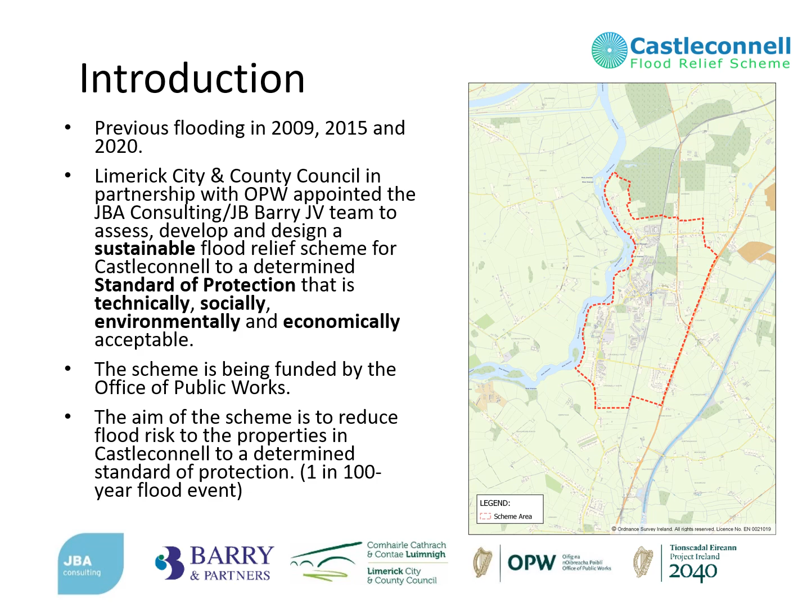There are 5 stages to the scheme, which is currently progressing through stage 1. This takes us from project commencement to options assessment, scheme development and design. This is the longest phase due to the level of assessment required to develop options that balance all needs of the scheme. The first public participation event was held in June 2020 to gather information from the public regarding the previous flooding experienced in Castleconnell and to understand what elements of a potential scheme are most important to the local community. Following this, the second public participation day was held in September 2022 to present a range of measures that had been considered and tested prior to arriving at 3 emerging preferred options. The public were invited to share their thoughts on each of the options and any potential constraints to their implementation, and asked to identify the option that they would like to see brought forward. This feedback aided in the identification of a preferred option, which is on display at tonight's event.

The scheme will soon progress to stage 2, and the planning submission to An Bord Pleanála is programmed for the end of this year. The detailed design will begin following the planning submission to allow the scheme to go to tender as soon as possible once planning permission has been granted. It is anticipated that construction will begin at the beginning of 2025, with the works expecting to take approximately 1 year to complete.

An updated and improved flood model was developed for the scheme to refine the work previously completed as part of the CFRAM study. The model was updated with a recent topographical survey and calibrated to both measured and anecdotal flood levels for past flood events. The Shannon downstream of Parteen Basin splits into 2 channels, the Ardnacrusha Canal and what's referred to as the Old River Shannon. The hydraulic model is a catchment-wide model for the Old River Shannon, from Parteen Weir to the north down to its confluence with the Mulkear River to the south. It also takes into account the tributaries along this stretch, including the Cedarwood and Stradbally streams within the village and their impacts on flood flows on the Old River Shannon. It was important to consider the capacity through Ardnacrusha Power Station to more accurately estimate the potential flows down the Old Shannon in flood events.

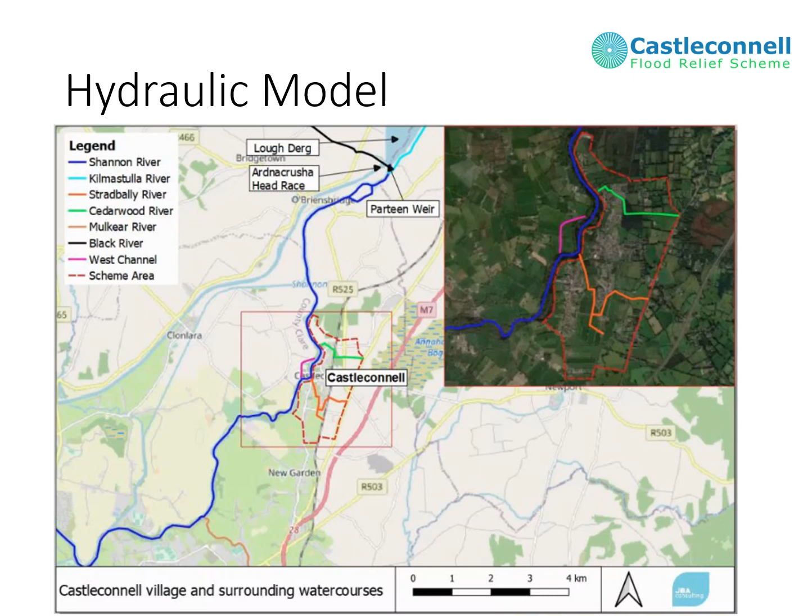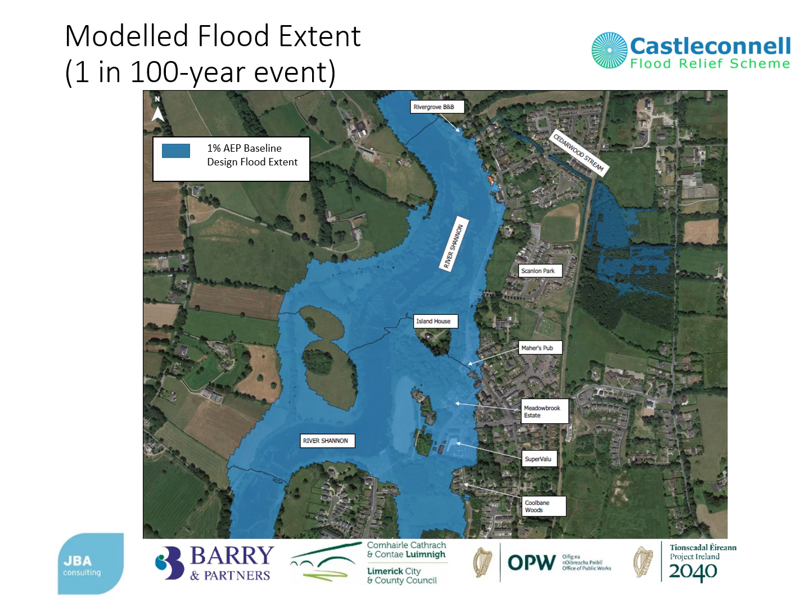The flood map on this slide shows the baseline flood extents for the 1% annual exceedance probability, or AEP, event. This is the equivalent to the 1 in 100 year event, which means that there is a 1 in 100 chance of occurrence in any given year. This modelled flood extent highlighted 50 properties which are at risk and allowed a suite of measures to be tested within the model for their effectiveness in protecting these properties. Those measures that proved effective were grouped into options, which were presented at last year's public participation event. The feedback received at this event was included in the options assessment and evaluation, along with other factors such as economic, social, cultural heritage and environment, and ultimately resulted in the identification of a preferred option. This option was presented as option 2 at last year's event and is the most extensive, offering protection to the Mall Road during a flood event.

Although this option is also the most expensive, with a challenging cost-benefit ratio, feedback highlighted the importance to the community of maintaining access to the Mall Road at all times. The proposed scheme includes defences such as floodwalls, embankments, road raising, floodgates, non-return valves and culvert replacement works, from Rivergrove B&B to the north down to Coolbane Woods at the south of the village.

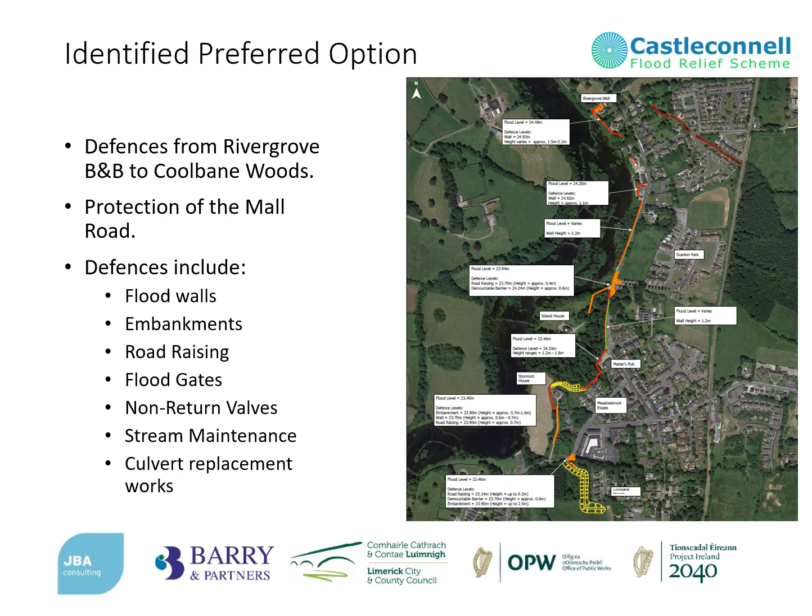Operational protocols and formal maintenance plans will be put in place as part of the scheme to ensure that the demountable defences are installed at a predetermined trigger and that they are inspected and maintained on an annual basis. Pump sumps are proposed at 3 low points in the village to pump surface water over the defences during flood events. Stream maintenance is proposed along the overgrown sections of the Cedarwood stream, along with some culvert replacement works. The scheme has been designed to ensure minimal impact on the adjacent special area of conservation and surrounding environment.

The proposed works to the northern properties include the construction of a new flood wall along the same alignment as the existing walls. Localised glass panels are proposed to maintain views of the river from key vantage points. The existing entrance to Rivergrove B&B will be replaced by a flood wall, and a new entrance will be provided at the northeastern corner of the property.

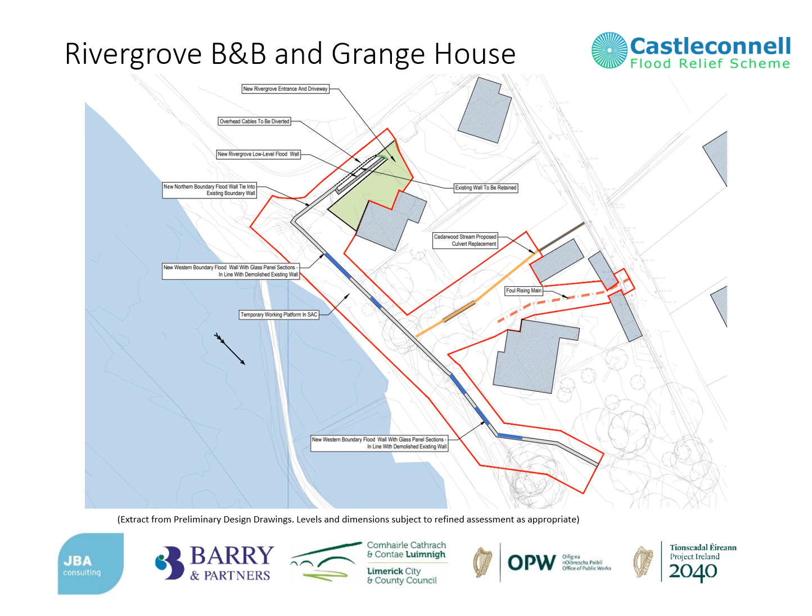Due to ground conditions, the proposed flood wall construction will comprise sheet-piled foundations with a capping beam supporting the wall above. The wall will be clad with a similar stone to the existing walls to maintain the architectural character of the properties. A new culvert will be provided for a length of approximately 36 metres at the downstream end of the Cedarwood stream, replacing an existing open feature. A proposed flood wall will wrap around the northern, western and southwestern boundaries of Mall House, and a floodgate is proposed across the entrance to Dunkeneely House.

The existing Mall wall will be removed and a new flood wall is proposed approximately 1 to 1.5 metres inside the existing alignment. This is to avoid impacting the adjacent Annex 1 alluvial woodland. Stone from the existing wall will be reused to clad the new flood walls where possible. Where new stone is required, a similar stone will be sourced locally if possible, to maintain the cultural and architectural heritage of the area. The 2 red arrows on this slide show the viewpoints for the photomontages on the next 2 slides.

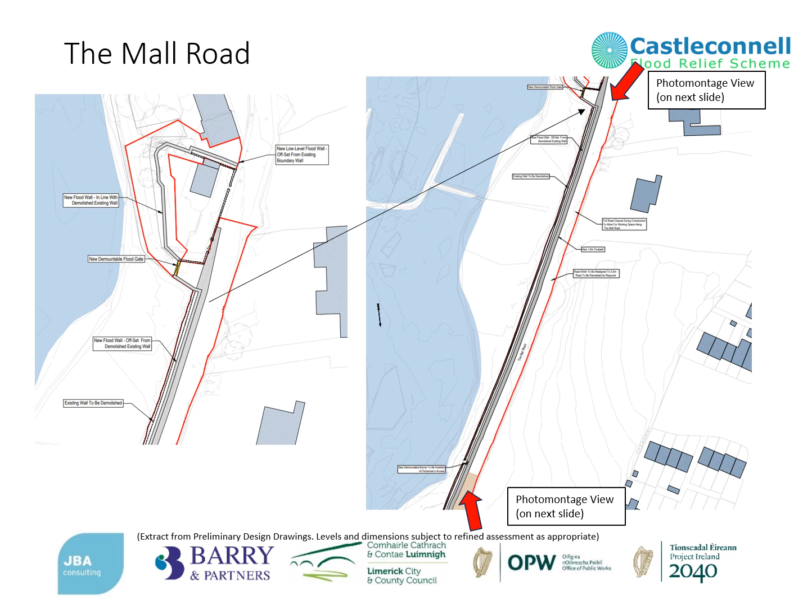The first viewpoint shows what the Mall Road looks like both before construction of the scheme and after, from a location outside Mall House and facing south. Although the new wall will be approximately 300 millimetres higher, it is not expected to impact the views of the river or affect the character of the area. The narrower road, which complies with minimum road widths in current standards, will have the added benefit of slowing down traffic entering the village from the north.

Viewpoint 2 shows the view from a point at the Scanlon Park Junction facing north. A demountable floodgate is proposed in the main fisherman's access, which will only be installed in advance of and during flood events, so that access can be maintained for the remainder of the year. The road will be raised by approximately 400 to 500 millimetres, forming a tabletop ramp across the entire junction.

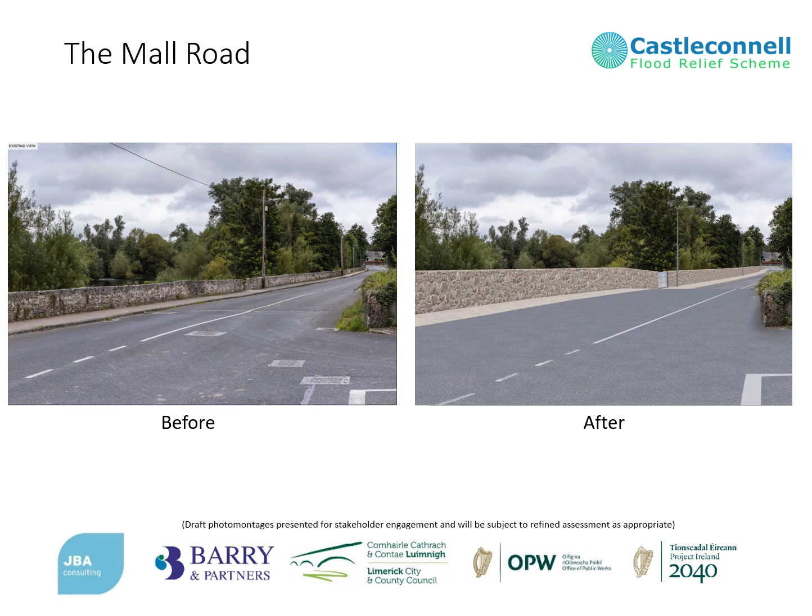This road raising provides passive flood protection for the 1% AEP flood event under standard operational conditions at Ardnacrusha. A floodgate is proposed at Island House to provide further protection for non-standard operational conditions with an allowance for freeboard. It is proposed to replace the existing stone wall from Island House to Maher's Pub with a new flood wall. Similar to the proposed wall along the Mall Road to the north, this wall will also be set back to avoid works within the adjacent special area of conservation, and the stone will be reused where possible to clad the roadside of the new wall.

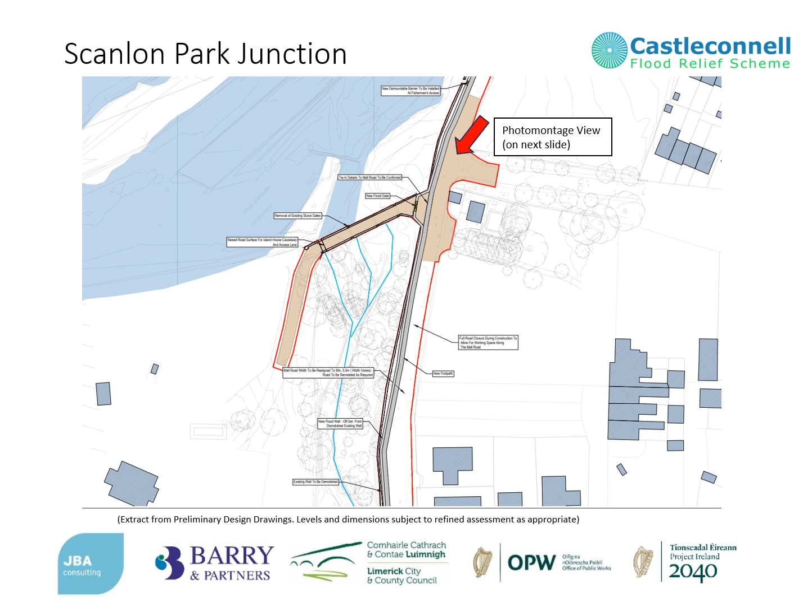Viewpoint 3 shows the view from a point at the Scanlon Park Junction facing south.

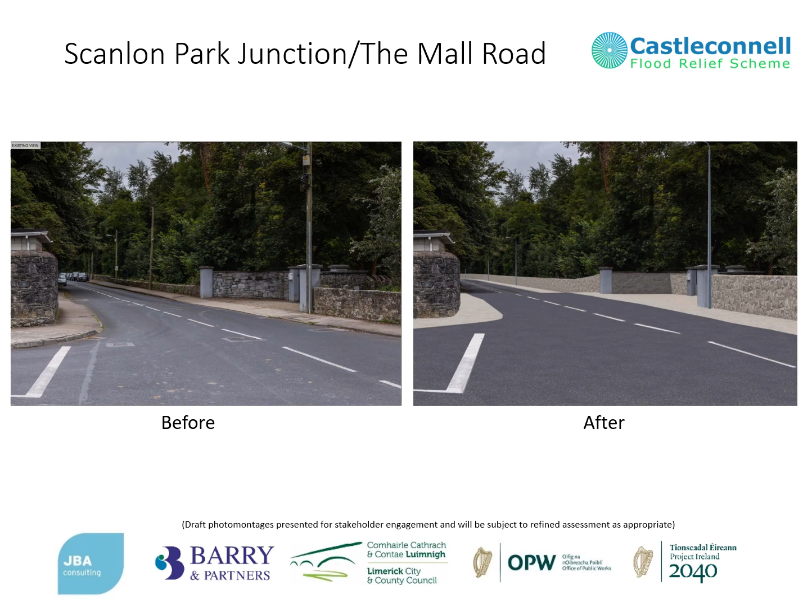A new flood wall is proposed along the perimeter of the Maher's Pub car park. This wall will be clad in stone from the car park side to ensure that it is in keeping with its surroundings. There is a large cedar tree that is home to a flock of herons located to the rear of the car park. The arborist report suggests that the roots of the tree may extend beneath the rear of the car park, and damage to these roots could risk loss of the tree.

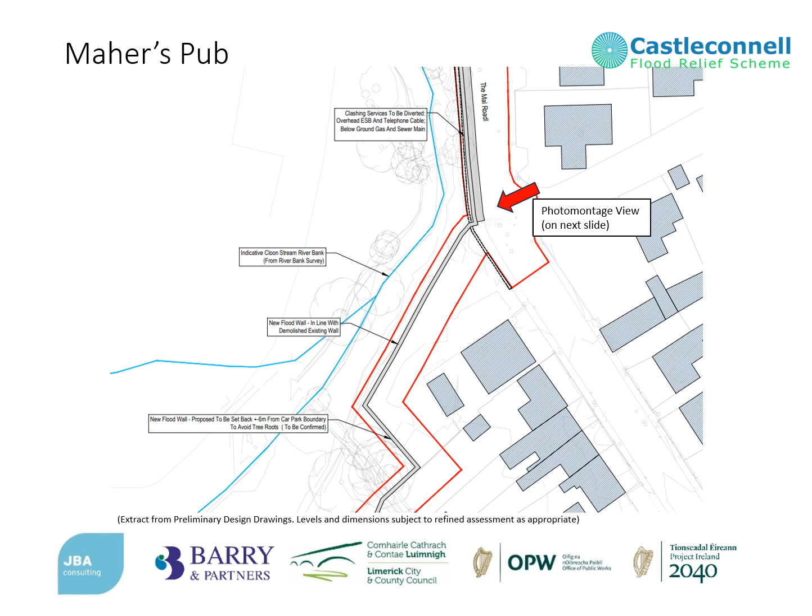The proposed flood wall at the rear of the car park will continue in a southwestern direction adjacent to the Meadowbrook estate, before tying in with a proposed embankment which wraps around Stormont House. From here, a new flood wall will be constructed inside the existing castellated boundary wall. Access for maintenance of the embankment will be via a locked gate at the end of the Meadowbrook cul-de-sac. Access to the public through this gate will be prohibited.

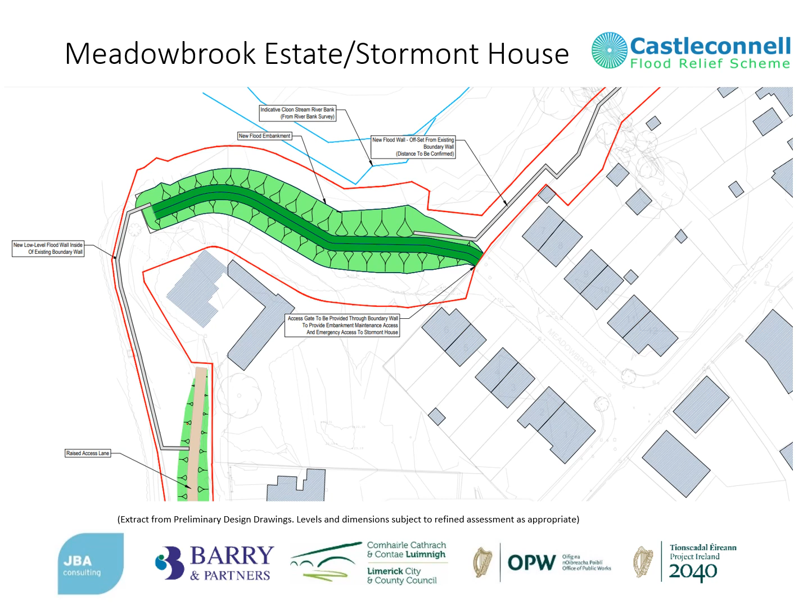The existing driveway to Stormont House will be raised by approximately 700 mm to form an embankment-type structure. A low-level flood wall, approximately 300 mm high, from the driveway to the rock outcrop at the castle will cut off flows from the south. It is proposed to conceal this wall with earth at either side.

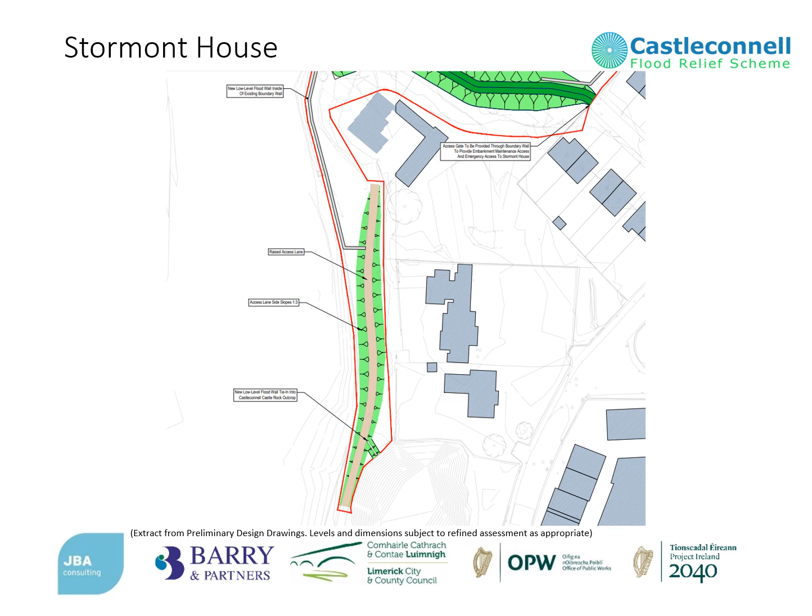A tabletop ramp at the Coolbane Woods junction will provide an element of passive protection, similar to the one at the Scanlon Park junction. A demountable flood barrier is proposed across the Chapel Hill Road to provide further protection up to the 1% AEP design event.

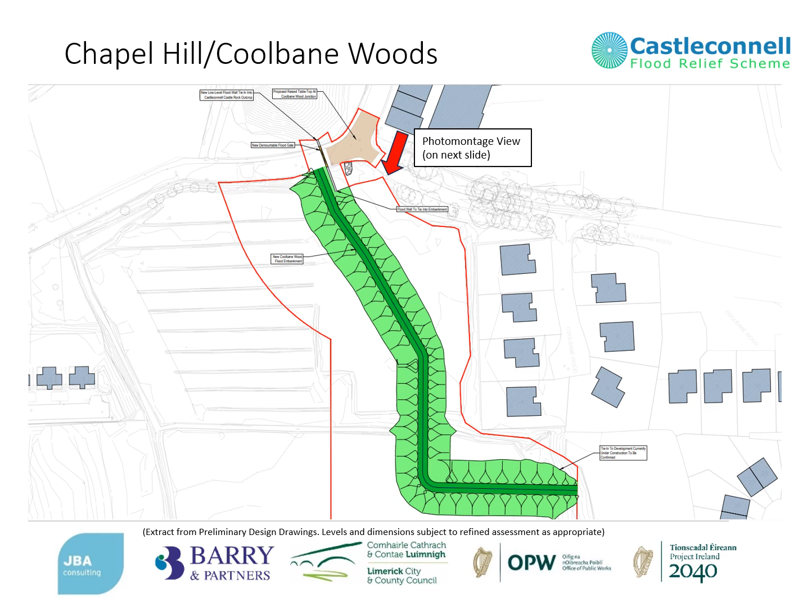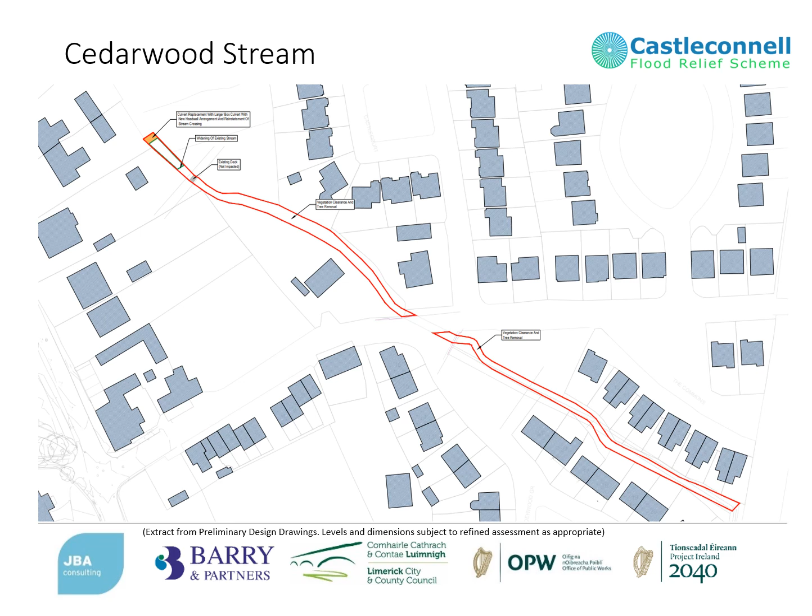The Cedarwood stream is currently heavily vegetated, over a length of approximately 300 metres. Removal of overgrown vegetation will form part of the scheme, with a regular maintenance programme proposed to manage further vegetation growth on an annual basis. It is proposed to replace an existing circular culvert with a larger rectangular culvert and widen the existing channel for a distance of approximately 15 metres immediately upstream of this culvert to ensure improved conveyance.

Climate change is an important consideration in any scheme to ensure that it remains operational into the future. For Castleconnell, there are two main avenues that can be considered: extending and raising defences, or a regional climate change approach to managing the River Shannon at a catchment scale. The scheme will be built to present-day flood defence levels, but the foundations will be constructed so that raising them down the line is possible without rebuilding walls and embankments.

Alignments of the proposed defences have also taken this into consideration to prevent the need to further realign defences in the future. The mid-range future scenario was modelled, which considers a 20% increase in flows, and showed that defences would be required at 3 additional properties in the future. A scheme-specific climate change adaptation plan has been developed as part of the project.

Now that the detail of the scheme has progressed, the Natura Impact Statement and Environmental Impact Assessment Report are underway. These, along with the feedback received today, will allow completion of the Options Report, which describes in detail the extensive optioneering that has been carried out to date, including measures that have been considered but not brought forward to option stage. The planning submission is currently scheduled for the end of 2023.

Our project website, which is currently under development, will be the main source of information and updates for the scheme. All information presented today will be uploaded to the website following the event. We would also appreciate if you would take a few minutes to fill out and return one of the questionnaires available here tonight. It will also be made available on the website for download and email back to us. We can be contacted via castleconnellfrs@jbaconsulting.ie or through the Contact Us page on the website for any queries you may have going forward.